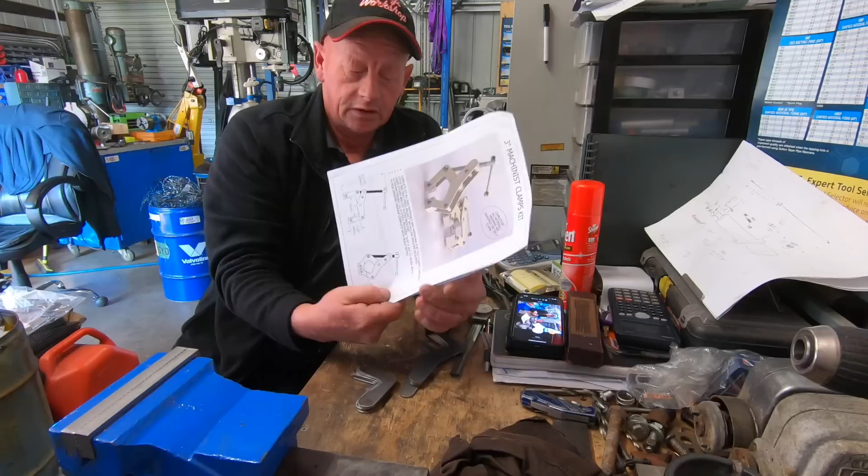Plan of attack is to gang all these up, clamp them, put a tacker weld across into a couple of spots, center punch the marks, and then start drilling and tapping on both the main bodies of the clamps. So I've had a good look through the plans.

Yeah, good set of plans. Well explained, very clear. So, time to get into it.

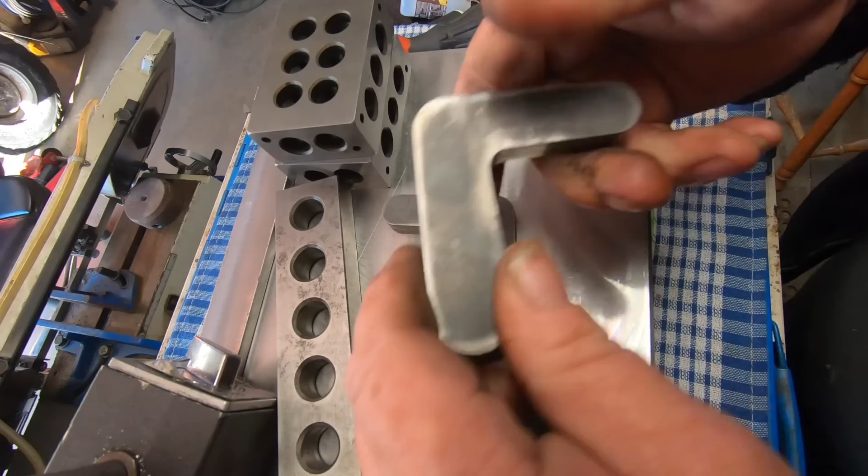Okay, I've just put a little tacker weld on them, just to hold them together. Now what I do is center punch these marks, these crosshairs, ready for drilling and tapping. But these have got to be center punched pretty accurately.

Okay, we're set up here. Got it sitting on a couple of parallels. Well, they were - it's in there nice and tight. I know that.

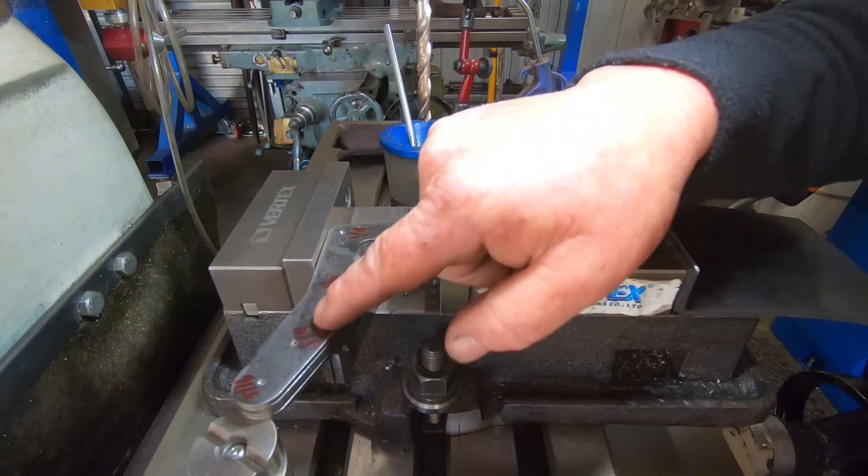Little jack under here to support it when I drill this back one out here on these couple. I've had a digital angle box on it, so I know it's sitting flat. So quarter, 5/16, quarter and 5/16. So it could be drilled and tapped.

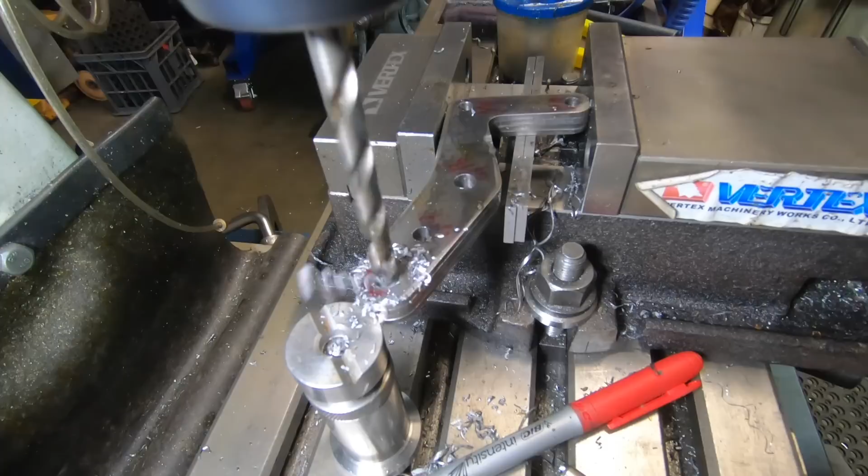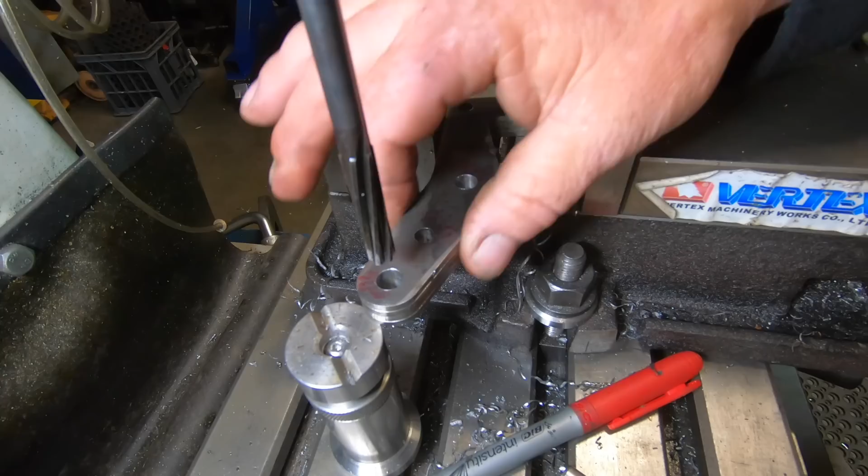All these have to be deburred now when they're taken apart, just a tiny chamfer on them all.

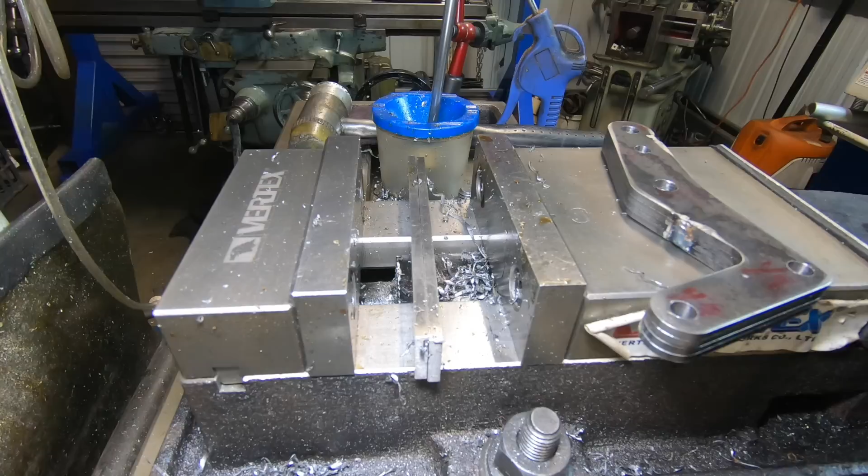So these plates in this set can all be broken apart now and then paired. They're all identical, so match them up as pairs and we're good to go.

Right, got the lathe warming up. It's been a good frosty morning, been an absolute cracker.

I was going to move on and make these spacer pins, but I've lent out my 1024 taps, so I've got to wait for them to come back before I do these parts.

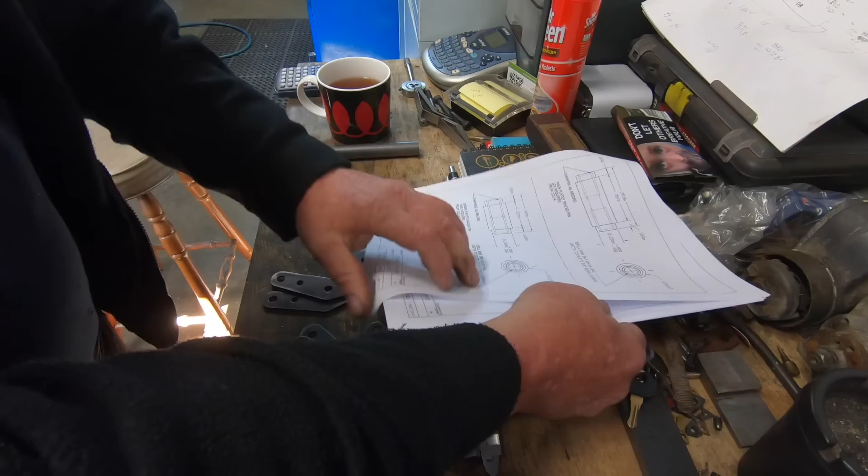I'm going to move on to making the hinge pins out of this 3/4 12L14, which I've never used before. I don't think I've ever turned 12L14. Apparently it's meant to be really free machining.

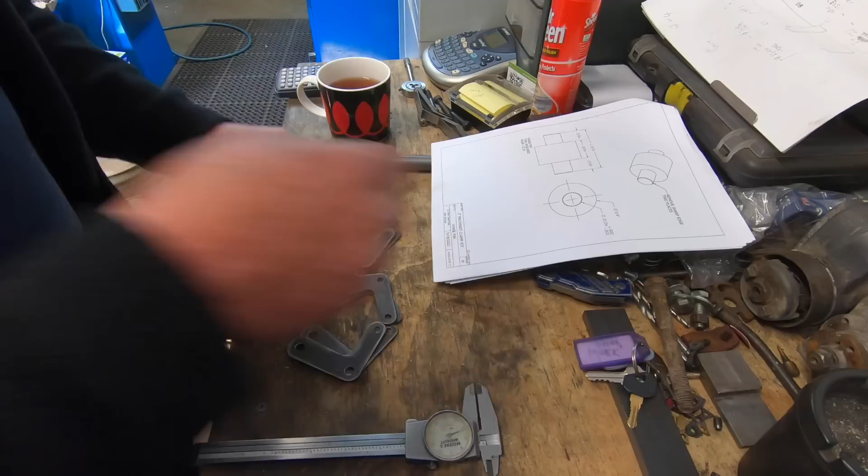So I've got the lathe warming up, cup of tea on the go. I've separated all these components and cleaned them up.

Ready to get into all the little bits. But it's bloody cold.

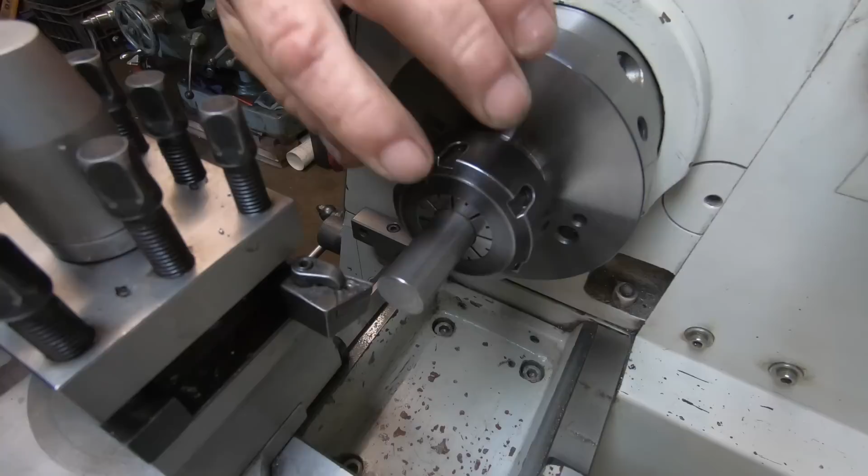Okay, I've got to face this off. Got to come in 315 thou from the end and take it down to 313 thou in diameter.

.313 on the knocker.

I can part this off to length now, spin it around and do the features on the other end.

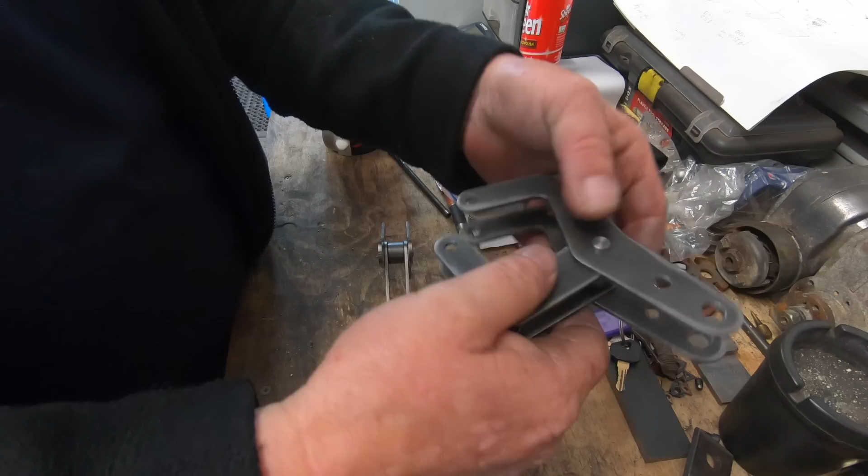There's one done. I'll make one more and that'll be them both finished. Well, those little main spacers turned out alright. That's where they fit. So it gives you an idea of what the shape's going to be.

The next two components to make is the block that the threaded pin, your thread, runs through. So it's basically exactly the same as the last lot I just made, but these have a through hole.

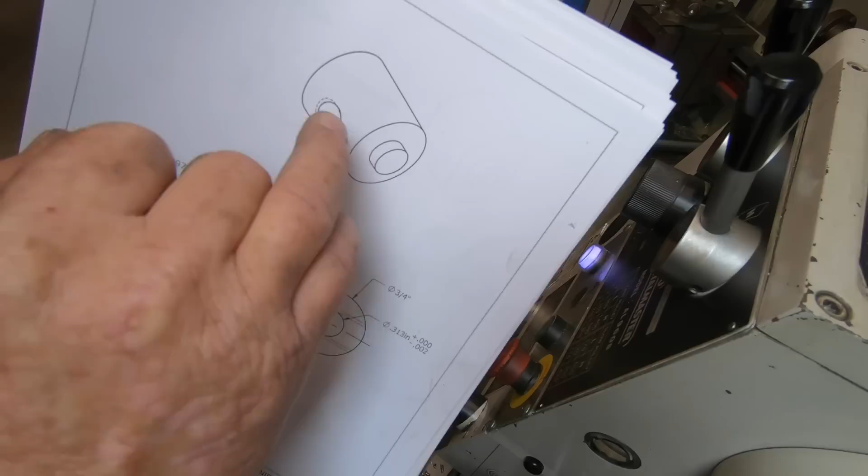With a 3/8-16 thread tapped through it. So I'm going to turn them down as a blank and bring them back, because it's exactly the same as what you've just seen, really. Slightly different dimensions on the width, and I'll bring them back when I'm putting this through on the mill and threading it.

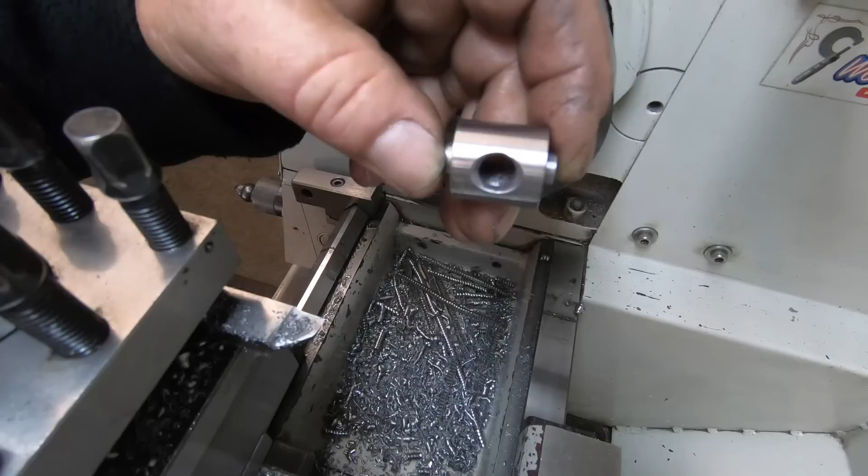Yeah, so that's one. Just got to thread the second one now, and then 2 bits are done. I just finished on that second one.

The chamfer's not quite as nice on that one at the top, but here's what it is.

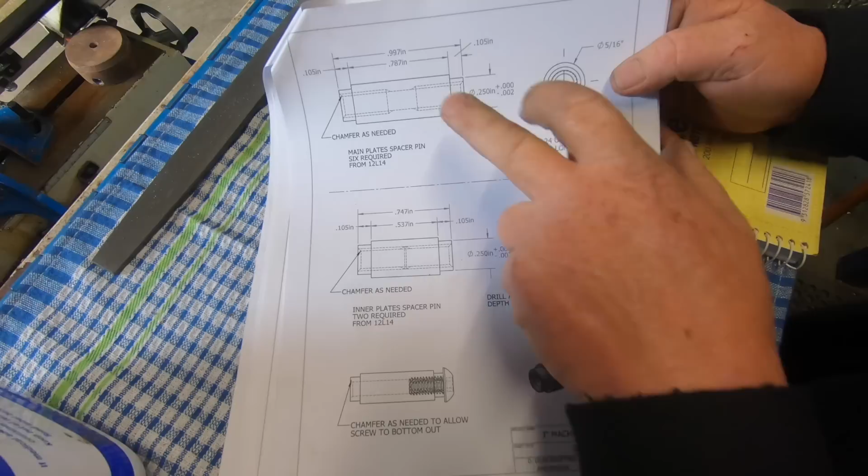Right, next on the to-do list, I've got 6 of these to build, 2 of these. So there's spacers that go between the side plates. So 6 of them, 2 of them. I'm only going to show making one, and I'll make all the others off camera. The only difference with this one is it's shorter. So I'll get into it.

Okay, I'm going to tap these before I machine the ends down.

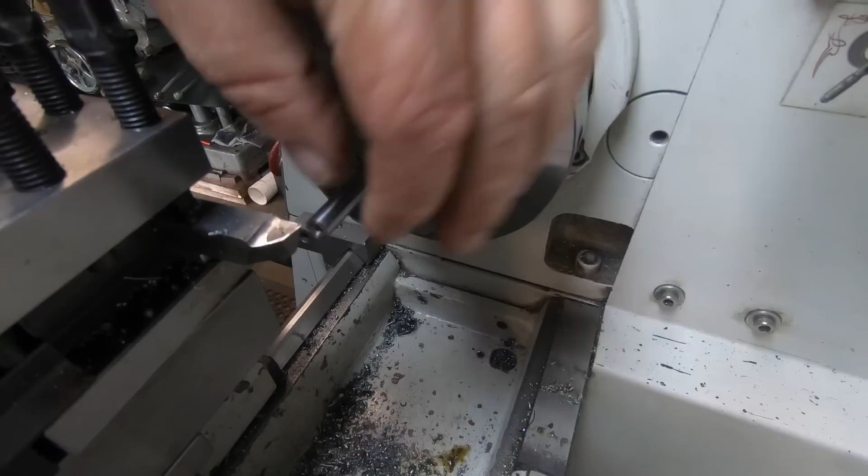So yeah, we've got to reduce the shoulder down now to 1/4 inch, 105 thou long. I've got an indicator set up back here on the carriage, so I just run off the indicator to get my depth or length right, and just use the hand wheel.

Part this off now, 1 inch long, and then face it back to 997.

I just measured it, I got 12 thou to come off the end. Face the end off 12 thou.